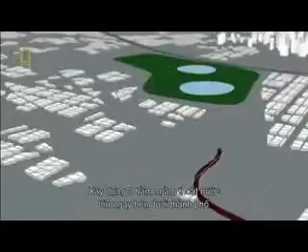Malaysia, one of Southeast Asia's fastest growing cities. A booming Asian tiger. But every year, Mother Nature threatens to bring it to its knees. Tropical storms, raging rivers, massive floods. The solution is brilliant. Carve a single giant road and water tunnel right under the city itself.

When rivers jump their banks, the tunnel's road decks will be able to transform into massive flood channels to carry the raging waters under the city streets, leaving the country's billion-dollar economy humming along above, high and dry. Build it wrong, and millions of dollars of property and the lives of hundreds could be at risk.

It would be the first combined storm and traffic tunnel in the world, a model for other flood-prone cities. But the threats of sinkholes, massive mechanical failure, and fire will haunt the builders of Malaysia's smart tunnel from day one.

This is one of the world's most amazing structures. A 9.7-kilometer long megatunnel drilled through some of the most unpredictable ground on the planet. Amazingly, it's being constructed just meters below the streets of a major city.

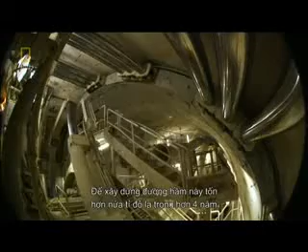The smart tunnel will cost more than $500 million to build. It will take over 4 years to finish, and the project's giant tunneling machines will grind through enough earth to fill up over 500 Olympic-sized swimming pools.

Kuala Lumpur, Malaysia. This modern Asian metropolis lies at the intersection of two major rivers, the Klang and the Gombak. For more than a century, these waterways were the lifeblood of Malaysia's capital. But now, they may be the biggest threat to the city's survival. Every year, tropical storms lash Malaysia, causing its rivers to rage. When floodwaters reach Kuala Lumpur, the rivers can jump their banks and ravage the city center. Floods like this one leave a cleanup bill in the millions and cripple the city's economy for days.

No one knows the problem better than Malaysia's Director General of Irrigation and Drainage, Dr. Keizrul. Kuala Lumpur is a meeting point of two rivers, and at the point where the two rivers meet, this is a natural depression. It's like a bowl in the river basin. And during heavy rain, this whole bowl gets flooded with water.

Ever since Kuala Lumpur put itself on the map by building the world's highest twin towers, it's been racing to compete with the financial hubs of nearby Singapore and Hong Kong. Leaving its economy at the mercy of nature isn't an option. The Malaysian government desperately needs a solution. The winning proposal is a radical one, a plan that promises to tackle the flooding and the city's worrying rise in traffic delays in one go.

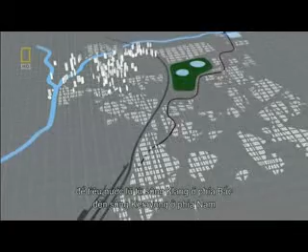The project is called SMART, short for Stormwater Management and Road Tunnel. The SMART concept is surprisingly simple. First, build a massive 9.7-kilometer-long tunnel directly under Kuala Lumpur to safely funnel floodwaters from the Klang River in the north to the Kerayong River in the south. Then, insert a 3-kilometer-long double-level toll roadway to help solve the city's traffic problems. Commuters can travel on the road decks while water flows below in a sealed flood channel.

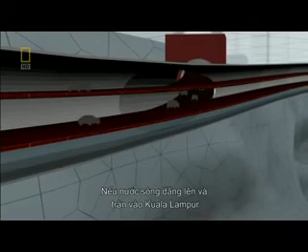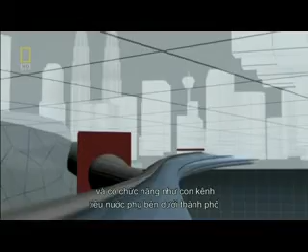But that's not all. What makes the SMART design truly unique is a feature that would arm the city against a worst-case scenario. If a giant river surge is headed toward Kuala Lumpur, the two road decks could be evacuated and serve as additional flood channels to carry the raging waters underneath the city and spare the country's billion-dollar economy above. It would be the first tunnel of its kind in the world.

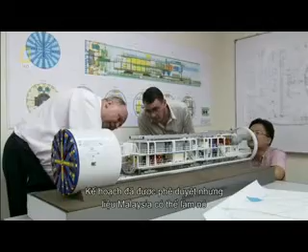But building this megastructure just 20 meters below the streets of this major city is a monumental challenge. The ground under Kuala Lumpur is a tunnel engineer's nightmare, full of karstic limestone that can collapse and suck down buildings and even people above without warning. The SMART plan is approved, but can Malaysia actually build it and finish the work in time for the next giant storm?

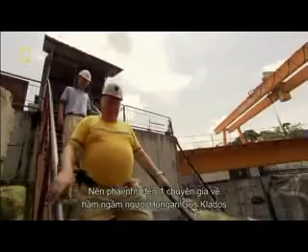January 2003, Malaysia's heavyweights in engineering and construction start work on the SMART. But this kind of tunneling is new to them. The risks of the project are too great to go it alone. The solution is to bring on veteran Hungarian tunneler Gus Klados. Gus knows that the stakes are high, and in tunneling, anything can happen.

I started to work on tunneling sites in summer holidays. And I fell in love with the thing because it's interesting. It's always different. Nothing is ever the same again. A tunnel warrior, Gus has worked on some of the biggest underground projects in the world, including the Channel Tunnel linking Britain and France. I worked on the Channel Tunnel, but the SMART Tunnel is much more challenging. To start, most of his crew have no tunneling experience.

We only had a core of people, professional people who had the experience, and we had to recruit people from the region, from Malaysia and from Philippines and wherever, from the near region, and we had to train everybody on the job.

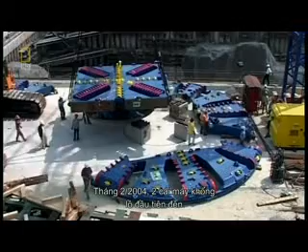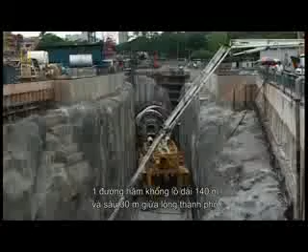February 2004, the first of the 2 mega machines start to arrive. It takes 3 months to assemble at the project staging zone. A giant shaft, 140 meters long and almost 30 meters deep in the middle of Kuala Lumpur.

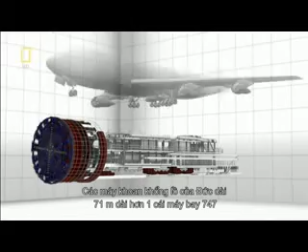To accommodate a stormwater channel and a double-level internal highway, the SMART tunnel has to be more than 13 meters wide. The fastest way to bore a hole that big is to use some of the largest tunnel boring machines, or TBMs, on Earth. The giant drills custom ordered from Germany are 71 meters in length, longer than a 747.

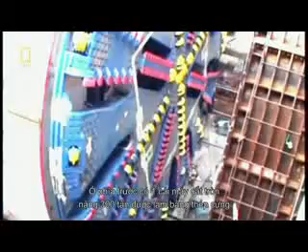Weighing in at 2,200 tons apiece, they're almost as heavy as a dozen jumbo jets. At the front, a 300-ton circular cutter head forged from high tensile steel will do the heavy work.

A TBM is an amazing machine that both drills and builds. While digging out new earth, the massive drill edges forward. Then it throws up rings of high-grade concrete. These form the lining of the tunnel.

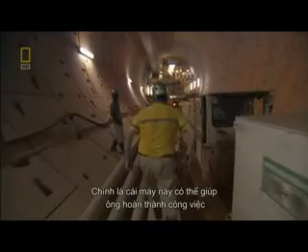From day one, Senior Project Manager Gus Klados is under pressure to complete the project. If any machine can help him do it, it's this one. Each of the SMART's cutting-edge TBMs cost almost $25 million.

This machine has all the features. One could consider it a very luxurious one in the tunnel boring world. This is the Rolls-Royce of the tunnel boring machines. They're armed with the latest ring-building lifters and hydraulic rams. The massive cutter heads are larger than those used to build the Channel Tunnel.

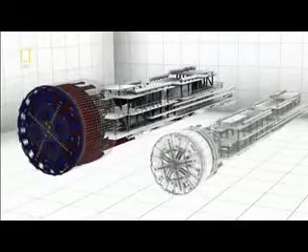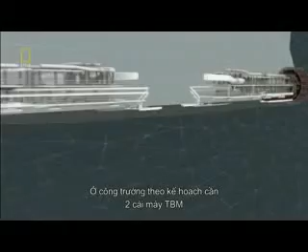May 2004, the second TBM arrives. Any major damage would require custom repairs in Germany and set the project back months. From this staging zone, the plan calls for 2 TBMs and their crews to dig outward. One team will head south to the Kerayong River. The other will link up at the Klang River to the north.

The job requires the tunnelers to work round the clock for nearly 3 years. It will push the men and machines to the limit. Tunneling finally begins in the South Drive, but immediately there's a problem: the workers are struggling to build the rings. The huge concrete lifters have to be controlled down to the millimeter using tiny joysticks.

Malaysian engineer Ng Hao Wei has to keep the men on schedule. I mean, the first time we didn't know what to do actually. We just follow what they asked us to do. It took about 3 hours for one ring build. At that pace, the project would take almost 3 years longer than expected and run millions of dollars over budget.

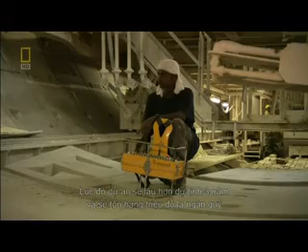And that's not the only risk. Boring these leviathans just meters below the city streets could cause a major catastrophe. It would be the first structure of its kind anywhere in the world. A giant dual-purpose tunnel for stormwater and traffic. If a flash flood strikes, the roadways inside the tunnel could transform into emergency water channels to help steer the surge safely under the city and spare its racing economy above.

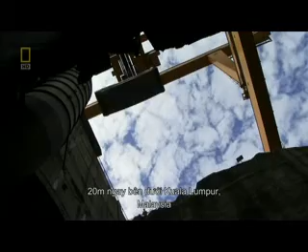20 meters under Kuala Lumpur, Malaysia, Senior Project Manager Gus Klados is under pressure to complete the SMART tunnel before the next crippling storm. But his workers are still struggling with the materials and machines. Ahead, the giant drill is already in motion, grinding steadily forward. Behind, concrete segments are on their way to the TBM.

One segment is 10 metric tons, and it is lifted by vacuum only. Giant hydraulic arms swing the segments into place. It takes 8 segments to build each ring. Just like in an arch, there's a keystone that holds everything together. Using the power of suction, the lifters raise and position each segment down to the millimeter. Make one mistake, and the tunnel lining could crack.

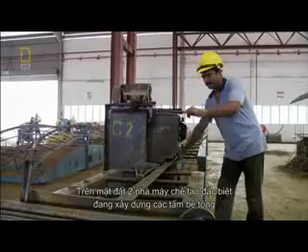Above ground, 2 special fabrication plants are also in full swing, building the concrete segments. Each one contains more than 300 kilograms of steel rebar. They're held together with high-grade concrete, the kind used to build bomb-proof bunkers. The tunnel lining needs to be strong enough to handle the load of a double-deck motorway and 1 billion liters of raging water.

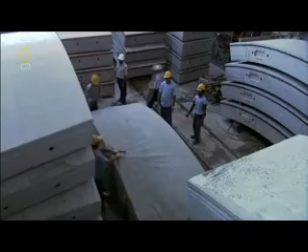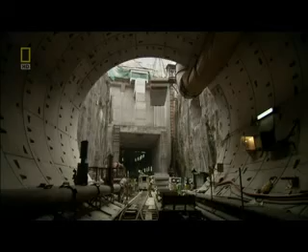At maximum speed, the plants can turn out more than 1,000 segments a week to feed the teams working both the north and south tunnels. Back in the TBM, the workers have finally mastered the machines, and the SMART is on schedule. Now, it's a race to build faster and faster.

We are always competing with each other for the ring build. If they build 6 rings, we have to build 7. Okay, if they build 7, we have to try for 8, of course. While speed is important to the tunnelers, the project's engineers have other worries on their minds.

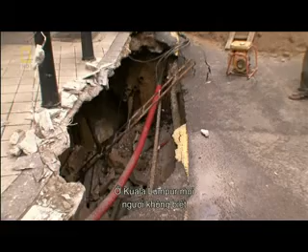Kuala Lumpur lies on some of the most treacherous ground on the planet. It's a tunnel engineer's worst nightmare, a condition geologists call karst topography. Over millions of years, acid in rainwater has slowly eaten away at the limestone bedrock. The result is a vast underground landscape of cliffs, cavities, and fissures, ranging in size from tiny cracks to colossal caves. In Kuala Lumpur, most people don't know they're there until they collapse and bring down the city with them.

From the start, engineers knew that building the SMART would require sending the tunnelers and their machines straight into this underground minefield. The stakes are huge. If one of the giant drills hits a large, unstable cavern, it could trigger a monstrous sinkhole.

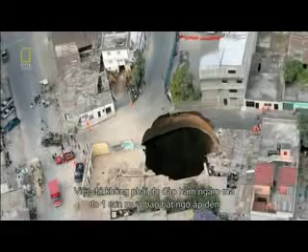Wherever they occur, sinkholes can come in all shapes and sizes. This one in Guatemala was 40 meters wide. It sucked down houses and killed 3 people. It wasn't caused by tunneling. It occurred suddenly after a major rainstorm. If a sinkhole this large happens in Kuala Lumpur, the results could be catastrophic. It's not the first time engineers have faced this danger.

Rewind to 1992. Plans are underway to build the Petronas Twin Towers on a site in downtown Kuala Lumpur. They would be 88 stories tall, the highest twin towers in the world. Together, their concrete and steel would weigh more than 400,000 metric tons. Place that much weight on unstable ground, and the results could be disastrous.

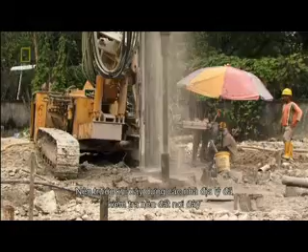So before construction began, geologists launched a massive site survey. And luckily, they made a crucial discovery. Under the planned site was a giant limestone cliff that could have caused the towers above to sink and even collapse. The original site had to be moved 60 meters.

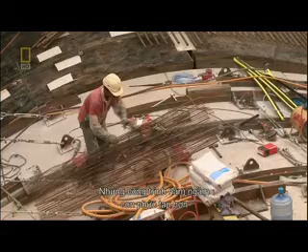But building the SMART tunnel would be much more complicated. The Twin Towers rested on just over 18,000 square meters of ground, an area small enough to survey completely before construction started. SMART, on the other hand, has a 10-kilometer-long footprint. Its site covers almost 7 times as much ground as the Twin Towers. Surveying every single inch of this much earth isn't an option.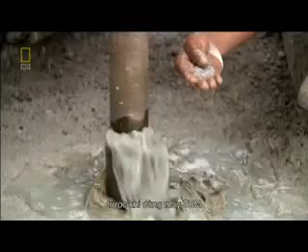To reduce the risk of collapse, geologists have to probe constantly ahead of the TBMs. We were probing ahead of the machine, and we were always looking for solution features which were large enough to allow the machine to drop into or dip into, because it would have stopped the tunneling for months.

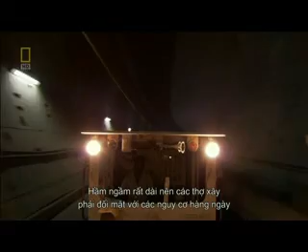Whenever the surveyors hit a cavity, they pump it full of concrete-based grout. But karst cavities can be less than 1 meter wide, making it nearly impossible to locate every one along the tunnel's entire route. SMART's long underground journey meant that the tunnelers would face new risks every single day, month after month, for almost 3 years. With so much at stake, the choice of TBMs was critical.

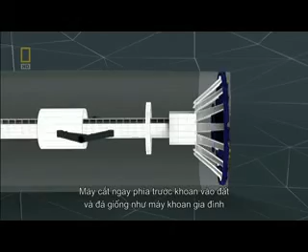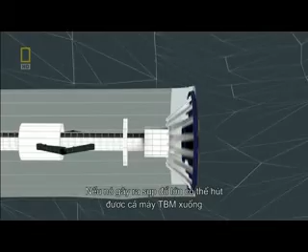The way most tunnel boring machines work is surprisingly simple. The cutter head at the front grinds through soil and rock, much like a household drill. The resulting waste is then loaded on wagons and carried out of the tunnel. This kind of TBM is designed for solid ground. If the drill hits weak cavities, like those under Kuala Lumpur, the earth could cave in on the cutter head. A big enough collapse could even suck the TBM down with it.

The TBMs chosen for SMART are specially armed. Their advantage is a sealed high-pressure chamber at the head of the drill. This is pumped full of liquid called bentonite slurry. The intense pressure of the slurry on the rock face fills cavities before they can collapse as the TBM grinds forward. The sealed pressure zone also provides a barrier between the tunnelers and the unstable ground ahead of them. At least, until something goes wrong.

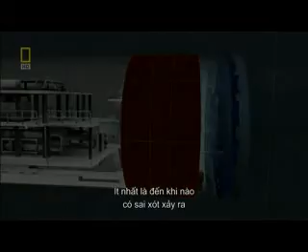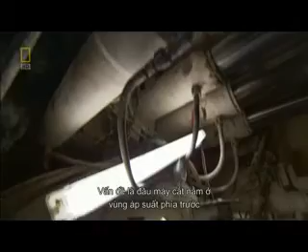Inside the TBM in the North Drive, there's a problem. The giant drill's progress has slowed dramatically. The team needs to find out why. The TBM's cutter head is armed with 76 forged steel discs to tear through rock and soil. Gus believes the cutter discs have worn down and may need to be replaced. The problem is, the cutter head lies in the forward pressure zone. To get there, the workers have to wait it out in a hyperbaric chamber until it's safe to go inside.

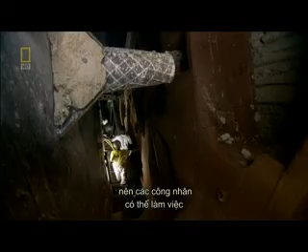The cutter head compartment has been drained of slurry so the men can work. But if the TBM is stopped inside a weak karst cavity, a sudden drop in pressure could cause the ground ahead to cave in.

First, shift engineer Hawei needs to measure the cutter discs. To access each disc, he has to rotate the giant drill. One wrong move and the rock face could weaken. The cutter discs are too dull to continue tunneling. They'll have to be replaced.

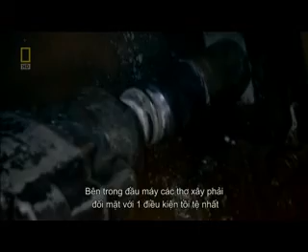Inside a pressurized cutter head are some of the worst conditions a tunneler can face. It's noisy. It's hot, with temperatures up to 45 degrees Celsius. And there's barely enough space to move. Speed is critical. Every time the cutter head moves, there's a new risk of falling rock and soil.

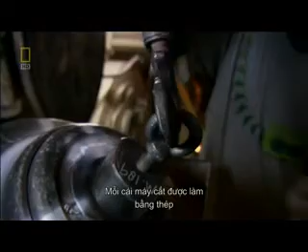Finally, the first cutter is free. Replacements arrive through a pressure lock. Each cutter is forged from tool steel, some of the hardest metal on the planet, and weighs 200 kilograms. Working in shifts, it takes 64 hours to finish the job.

For Gus, the sound of the drill ramping back up to speed is a welcome sign that the problem is over. You can hear the cutter head starting up now, this wah, wah, wah noise. Means the machine is excavating again. The cutter head drive is 4,000 kilowatts. It's quite something. I love this noise. It means the machine is working well. It's fantastic.

Hi, Rob. What's up? Keeping the machine serviced and on schedule is Gus's priority. But he also has to make sure the TBM follows a precisely defined path. The ideal route for the Smart would be a straight line, but unfortunately, that wasn't an option. The reason may be surprising: local property law. In Malaysia, property owners don't just own their land, they also own everything that lies below it, all the way to the core of the earth.

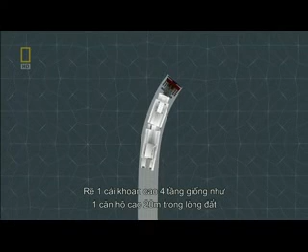Since the tunnel's original route would send it careening into hundreds of private property plots, city officials would have to buy tunneling rights from each landowner, including one of Kuala Lumpur's most exclusive golf clubs. And that would have added millions of dollars to the project's cost. The solution was to send the giant tunnel under land already owned by the city, including streets and highways. But now, the Smart would require a series of sharp bends. Turning a 4-story high drill that's as long as a city block 20 meters underground isn't easy.

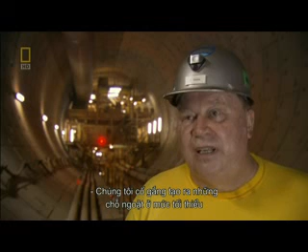An experienced tunneler, Gus knew what it would take. We tried to make the minimum curves possible with this size of tunnels. A 250-meter radius is a very, very small curve for a tunnel of this size. And as a consequence, we had to buy special machines to be able to negotiate these curves. A special giant bearing was installed at the front of the TBM to enable the drill head to navigate the tight turns.

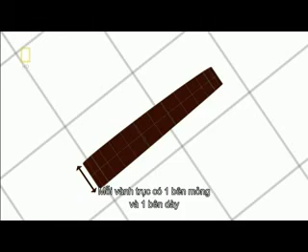And high-grade ring segments had to be specially fabricated to make the tunnel lining turn too. Each ring has a thick side and a thin side. If you put the thin sides back to back, you can make the tunnel turn any way you want. The TBM team is under constant pressure to finish the Smart on schedule.

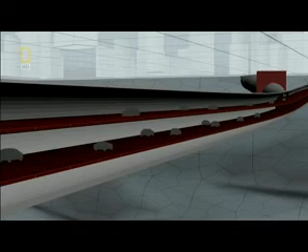But just behind the tunnelers, another challenge is looming. When we're building the tunnel, we don't have access to the whole tunnel. The road deck construction is right behind us, chasing us, if I can say that. The Smart's design calls for a double-level 3-kilometer roadway to be built inside the tunnel. The problem is they have to construct it less than 300 millimeters above the moving trains that carry crucial supplies to teams working deep inside. Many said it couldn't be done.

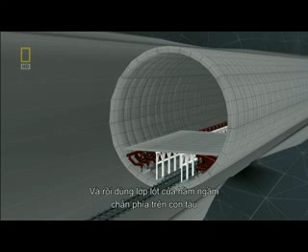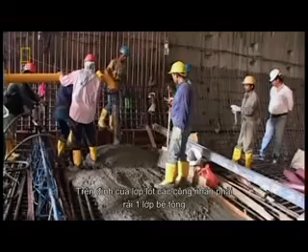The solution? To build just 2 key supports on either side of the train track, and then use the lining of the tunnel itself to help suspend huge precast slabs over the train. On top of these slabs, workers can pour the concrete for the road decks, while the train below keeps running round the clock.

June 4th, 2005. Across town, one of the TBM teams is reaching a critical project milestone: breakthrough in the South Tunnel. After drilling for 9 months and building 1,067 rings, the South Drive TBM emerges right on target.

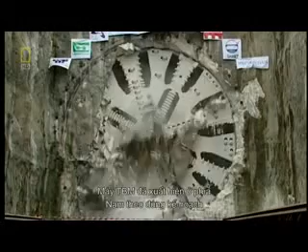But risks to the project continue, including what no tunnel operator ever wants to see. Tunnelers are more than 2 years into their big dig to build the giant smart tunnel under Kuala Lumpur, Malaysia. The tunnel will be the first of its kind on the planet, a combined roadway and flood channel that can protect this Southeast Asian city against future giant floods.

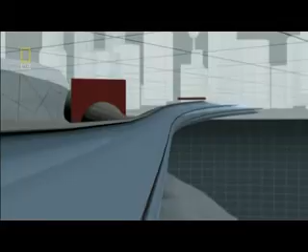Critical repairs to the tunnel boring machine in the North Drive brought tunneling to a halt. Now, the giant machine and its crew are back on schedule, racing again toward completion. After 3 years, the double-level roadway is finally open for business. But now, the lives of commuters will be at stake too. Thousands of vehicles are expected to travel through the tunnel every day. In just seconds, a single driver could trigger a major accident.

It's every tunnel operator's worst nightmare. A horrific scene like this one. It happened in the Alps, right on the border of Italy and France. It's March 1999. Deep inside the Mont Blanc tunnel, a truck carrying margarine has caught on fire and triggered a raging inferno. Cars and passengers already inside have no way to escape. Flames race through the tunnel, engulfing everything in their path. Firemen are blasted with a wave of poisonous gases and temperatures that reach 1,000 degrees Celsius.

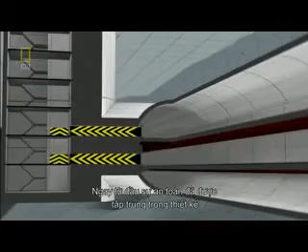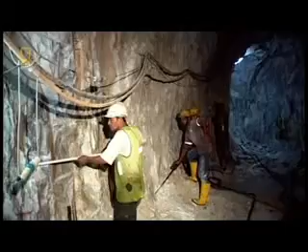From the start, safety has been a key focus of the SMART Tunnel's design. Every kilometer, teams have dug out ventilation shafts and escape routes leading to the city streets above. Every 250 meters, passages connect both road decks. Dozens of closed-circuit TV cameras monitor every inch of the roadways for the first signs of trouble. Waterproof safety lights had to be designed to withstand the force of raging floodwater. At the center of it all, a state-of-the-art control room. SMART's safety team has also been trained for a worst-case scenario.

And on April 5th, 2007, that's exactly what happened. Inside the SMART tunnel's top road deck, two cars have collided and flipped. In both, injured passengers. Flames start to engulf the vehicles. The control room spots the fire. The passengers are trapped. Rescue crews try to reach the scene, but smoke is filling the tunnel. An alarm notifies the control room that air quality is dropping fast. Fans in the ventilation shafts start to disperse the smoke.

Medics finally reach the injured drivers. Firefighters start to douse the flames. The smoke levels appear to be dropping. The passengers are on their way to hospital. And soon the fire is out. Officials breathe a sigh of relief. They have staged this accident to test the SMART's safety team. There's no telling what would happen in a real emergency. But this test, at least, has been a success.

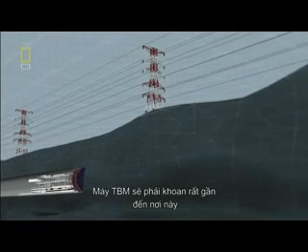The SMART's roadways will reduce congestion and traveling time into the city center. The tolls collected will help repay the $500 million cost of building the SMART. But unfortunately, the risk of a project overspend continues. Tunnelers still have 552 meters to go in the North Drive. Their TBM is chewing the earth 20 meters below a popular commuting route. And SMART's engineers could soon have a potential catastrophe on their hands. The TBM will have to drill extremely close to these, the pylons of Malaysia's national grid. If one of these towers topples, it could shut down power to much of the city.

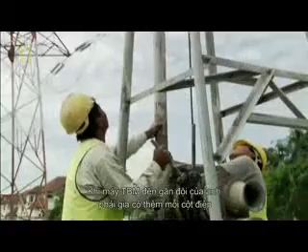Ensuring the safety of the pylons falls to senior geotechnical engineer S. Satkunasilan. The three pylons that are in close proximity to the TBM alignment form part of the national grid, and that makes it super sensitive. As the TBM approaches, Satkunasilan's team reinforces each pylon and carefully monitors it for the slightest evidence of movement. Meanwhile, the giant drill is grinding its way closer and closer.

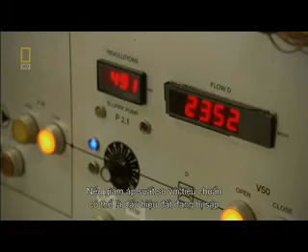In the TBM's control room, the driver starts to coax it as they near the pylons. He keeps his eye on the slurry pressure. Any drop in the gauge could be a sign that the ground is collapsing under the pylons. It takes 4 days of carefully waiting and watching. Finally, the TBM is past the danger zone. This risk to the national grid is over for now. The North TBM continues to grind its way forward.

Now, tunnelers have to commute 5 kilometers into the tunnel to reach the giant drill. The further in they go, the hotter it gets. Giant fans pump cool air into ventilation ducts that stretch all the way to the TBM. The tunnel is like a giant artery, feeding the men and machines inside with vital supplies, power, and a steady stream of concrete segments for the tunnel lining.

But when it comes to boring, the most crucial material of all is bentonite slurry. The thick gray liquid plays 3 critical roles. It keeps pressure on the rock face to avert sinkholes, provides a protective coating to the giant drill as it grinds forward, and carries the mined waste material back out of the tunnel.

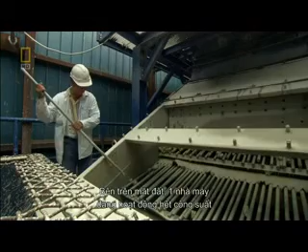Above ground, an enormous slurry plant is working around the clock. Inside, huge machines process and clean the slurry coming from the TBM. The mined rock and soil is separated and sent on to other construction sites. The clean recycled slurry is then piped back underground to the TBM to start its journey all over again. Giant pumps keep the slurry moving round the clock.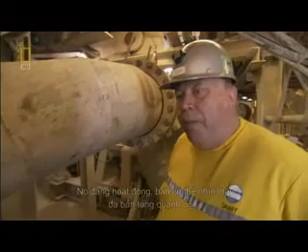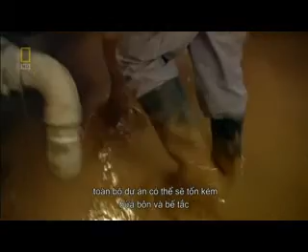This is the V2 slurry pump. It's on the machine. You can see the stones bouncing around in the pipe. This is the heart of the machine other than the cutter head. The pipes and pumps move enough slurry in and out of the tunnel to fill up more than 600 Olympic-sized swimming pools a month. Any break in the supply chain and the entire project can come to an expensive and messy standstill.

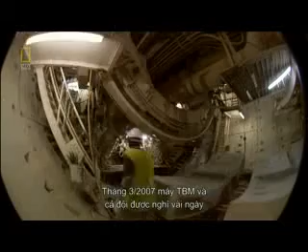March 2007. The TBM and its crew is just days away from their prize, breakthrough point at the tunnel's northern end. 19 more rings to go. But what happens next comes without warning. A huge drop in pressure on the slurry pipe feeding the TBM. Suddenly, hundreds of liters of thick slurry are flooding the tunnel. The slurry shorts a key electric cable. The TBM grinds to a halt.

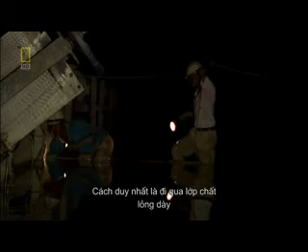Now, the tunnelers are 5 kilometers inside the North Drive in almost pitch darkness. They need to find the problem and fix it fast. The only choice is to wade through the thick liquid and search for the leak by hand. Attempts to repair the power lines fail. The clock is ticking. Finally, they find the ruptured slurry pipe.

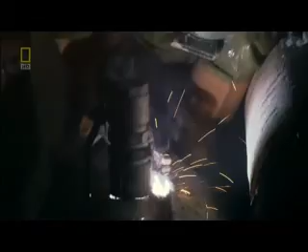The flood of slurry in the tunnel will have to be pumped out and a skilled pipe fitting team brought in to do the repairs. We're pumping it out now. When we get the level of the bentonite down, then we can take out the pipe and put the new pipe in. But there's limited light, power, and access. It takes the teams 3 days to fix the leak and clean up the mess.

The slurry system is finally back on track, but there's still a risk for more trouble ahead. Everything is overused and abused to such an extent by now that anything can break down. And if anything breaks down, we won't make it. People are a bit nervous, including myself.

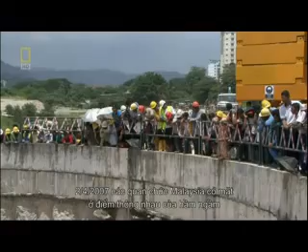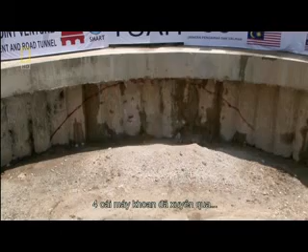April 2nd, 2007. Malaysian officials gather at the final breakthrough point, waiting for the TBM's arrival. After almost 3 years of tunneling, the 4-story high drill breaks through. A wave of pressurized slurry announces its arrival. They finally made it. The $25 million TBM will soon be dismantled piece by piece and shipped back to Europe for its next assignment.

For Senior Project Manager Gus Klados, it's been a rough but successful ride. To complete a 9-kilometer long tunnel, this large diameter tunnel in a city this close to the surface in more than difficult geological conditions, it's something, so it's good to be over. The workers Gus trained for the job are now experienced tunnelers. They've even broken a world speed record for their type of TBM, building 17 rings in a single day. It's a day they'll never forget.

It's a very special feeling, beyond words. I think everybody feels the same after a few years of hard work. Finally, we break through, and of course, there is more work coming. I say that we should celebrate now. Yes. Congratulations, guys. Very, very well done.

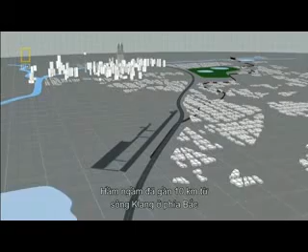Thank you. The SMART now reaches nearly 10 kilometers from the Klang River in the north to the Kerayong in the south. But just weeks after the breakthrough, a huge tropical storm lashes Malaysia. As water rises in the Klang and Gombak rivers, another flood in downtown Kuala Lumpur seems imminent. The tunnel has been built, but will it actually work? What will happen when the tunnel's roadways are flooded with millions of liters of raging water?

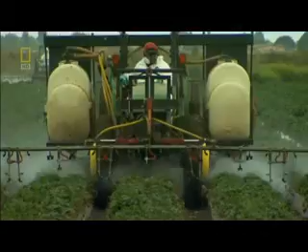A huge tropical storm pounds Malaysia. Floodwaters threaten to cripple the city of Kuala Lumpur. Officials prepare to put their giant new SMART tunnel into action to divert water from the Klang River in the north to the Kerayong River in the south. They still don't know yet if it will actually work.

The SMART tunnel was designed to handle 3 different modes. Mode 1 is for normal weather. In this mode, both levels of roadway are open for traffic, and the water channel below is closed and dry. When moderate storms hit Kuala Lumpur, the tunnel will enter Mode 2. The roadways will still remain open. Now, floodwater can flow underneath the traffic.

The most critical mode of all is Mode 3. If a giant flood surge is threatening the city, the tunnel roadways will be evacuated and the raging river water can surge down all 3 levels of the SMART. That is, if everything goes to plan.

The storm continues to drench Kuala Lumpur. As river levels rise, officials divert water from the Klang River into a holding pond before channeling it into the tunnel. Soon, floodwater is flowing under the road decks. As the hours pass, the river continues to rise. With more and more water filling the SMART, the time has finally come for the tunnel's ultimate test, a Mode 3 surge.

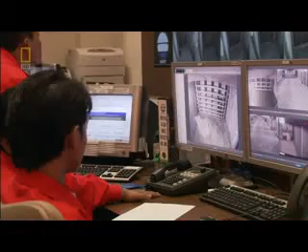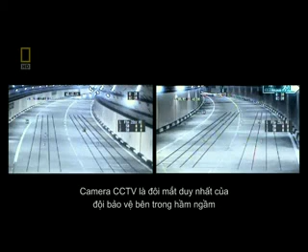350 mm thick doors seal off the road decks from the emergency exits and cross passages. Huge 37-ton hydraulic gates prevent floodwater from escaping to the city above. With the roadways cleared and sealed, it's time to unleash the surge. Stand by. Now, with the tunnel evacuated, the surge should flood the road decks. CCTV cameras are the safety team's only eyes inside the tunnel. They watch anxiously, waiting for the water's arrival.

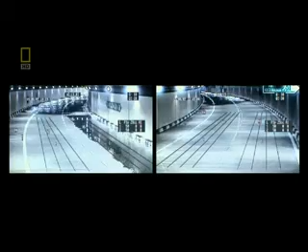Then it appears. The surge is flooding the roadways. A billion liters of floodwater are now racing down the SMART. Camera after camera tracks the surge's progress as it makes its way under Kuala Lumpur. As the minutes go by, the water fills the bottom roadway. In the upper deck, it's also rising fast. If the engineers' calculations are off, the roadways could crack under so much pressure.

So far, everything seems okay. The waterproofed lighting and electrical lines are still operational. The cameras are working. And the safety team is able to control the surge. Finally, the team spots the floodwaters flowing out of the tunnel south of the city. The SMART has passed its final test. It's working exactly as designed. Malaysia's Director General of Irrigation and Drainage, Datuk Keizrul, has been waiting for this moment for years. With this under our belt, I think we can be confident that we'll be ready when the big flood comes.

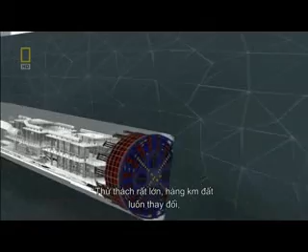It's a brilliant idea to solve a major city's traffic and flood problems with a single tunnel. The challenge was enormous. Kilometer after kilometer of treacherous ground, the risk of collapse and mechanical failure, all just meters under a major city. The SMART Tunnel will go down in history as the first megastructure of its kind. An achievement that the men who built it will never forget.

Nothing can stop tropical storms from lashing Malaysia. But now, Kuala Lumpur's location at the confluence of two major rivers may no longer be a threat to its growth. The SMART Tunnel is one of the modern world's most amazing structures, able to transform scenes like these into distant memories. The next time Mother Nature unleashes its fury on Southeast Asia, it'll be business as usual in Malaysia's booming capital.